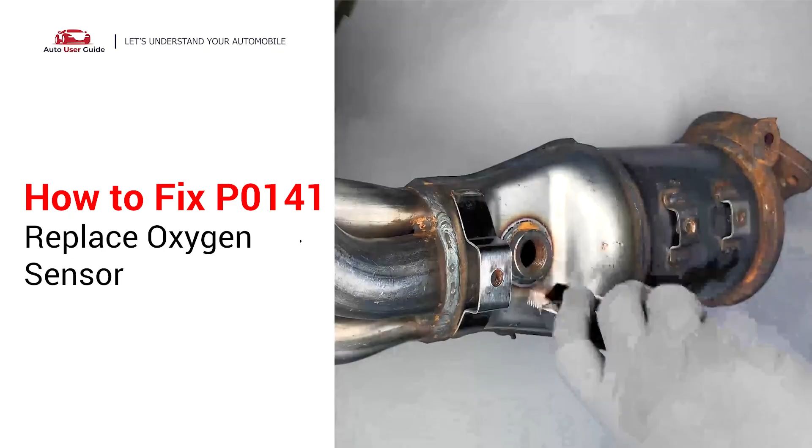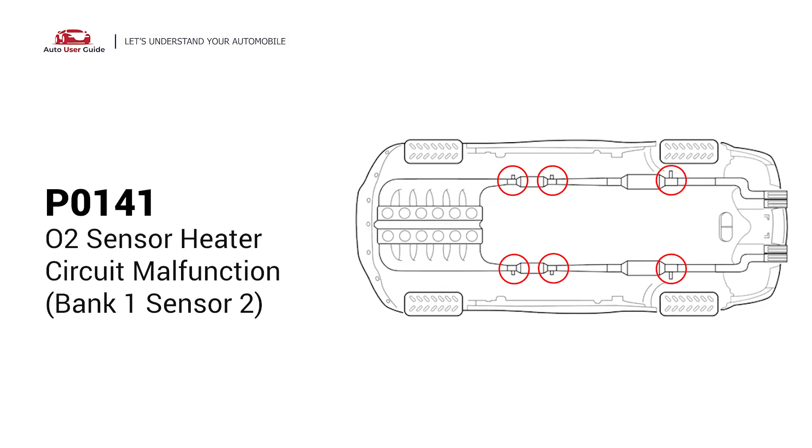By replacing the damaged oxygen sensor, you can easily fix the P0141 error code by yourself. This means that the O2 sensor circuit on bank 1, sensor 2, has no activity detected by the powertrain control module, PCM. Under this circumstance, short-distance driving is permitted, but your vehicle should be repaired as soon as possible.

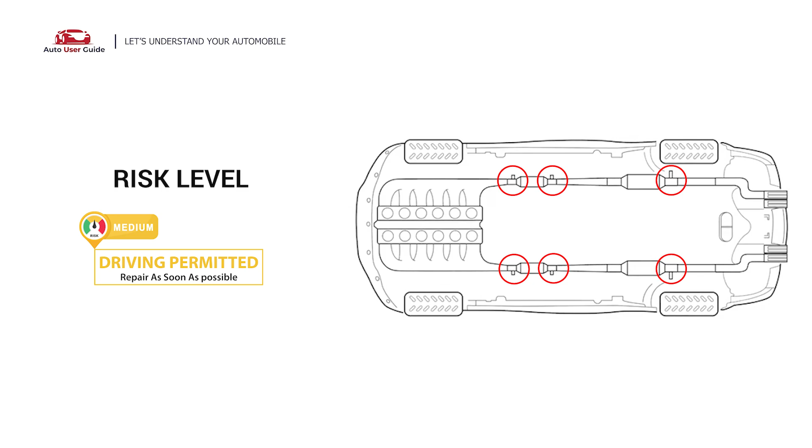Oxygen sensors, also known as O2 sensors, help determine whether the air-fuel ratio of combustion engines is rich or lean in real time.

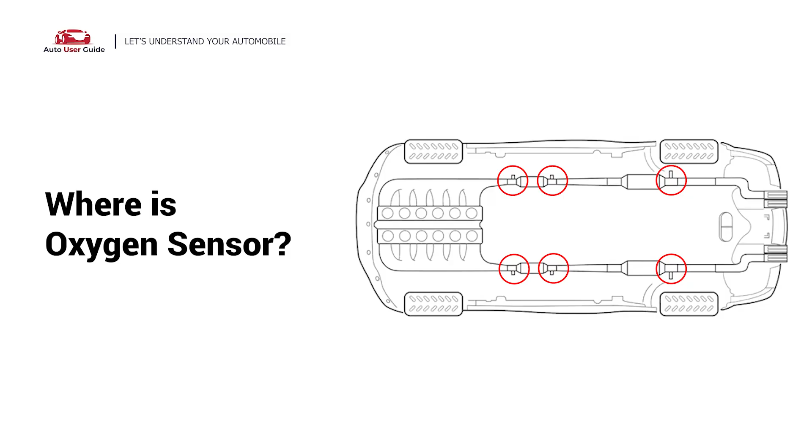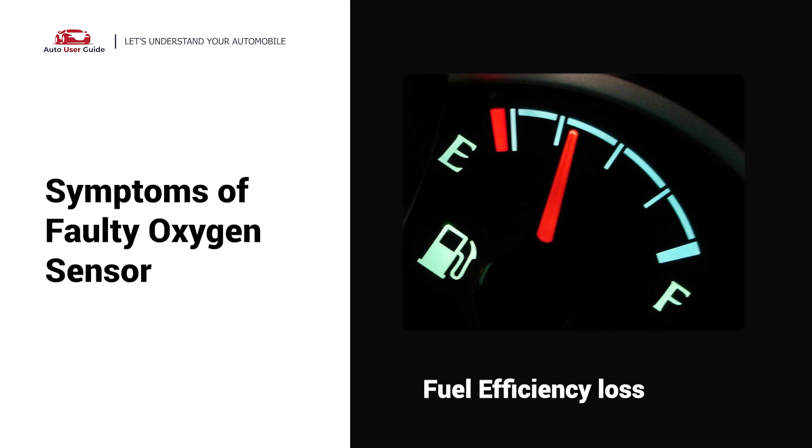Oxygen sensors are located before and after the catalytic converter, and here are the sensors' locations. A faulty oxygen sensor may cause black smoke to come out from the exhaust. You can notice fuel efficiency loss and a sulfur-like or rotten egg smell.

Here are two methods to fix the oxygen sensor. First, modify the oxygen sensor.

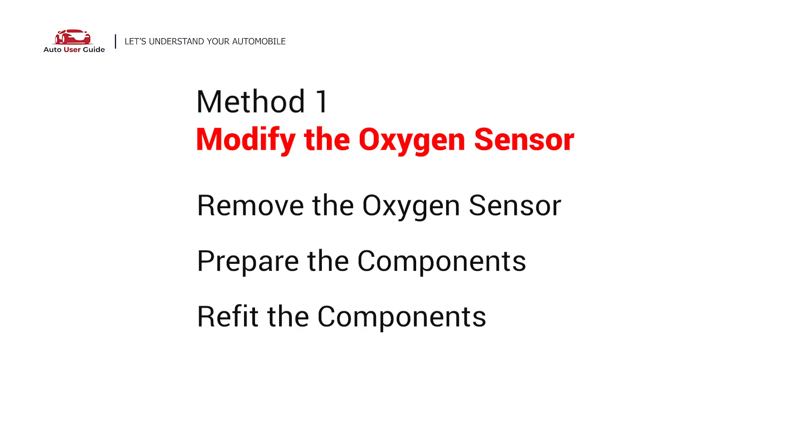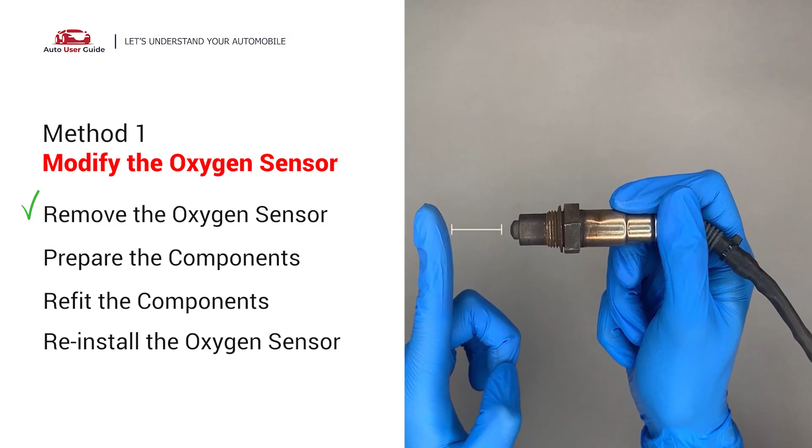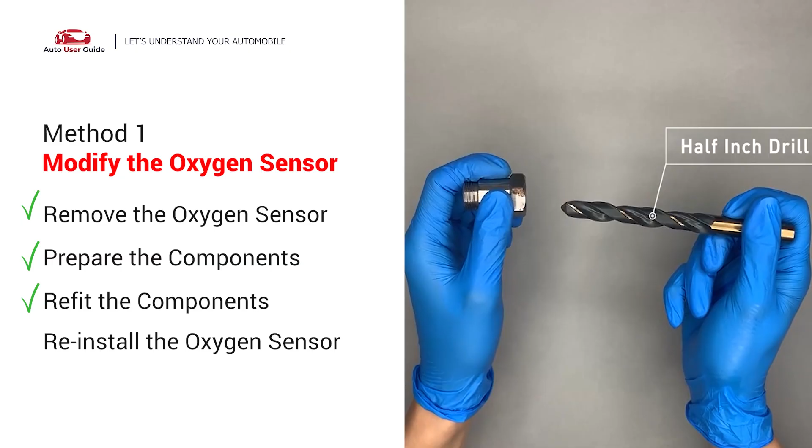You can remove the oxygen sensor from the converter by putting extra space between the sensor and the converter. Now, getting the spark plug non-fouler, there is now enough space to fit into the oxygen sensor, then use a half-inch drill to refit it. By doing this, put them together and put it back on the catalytic converter.

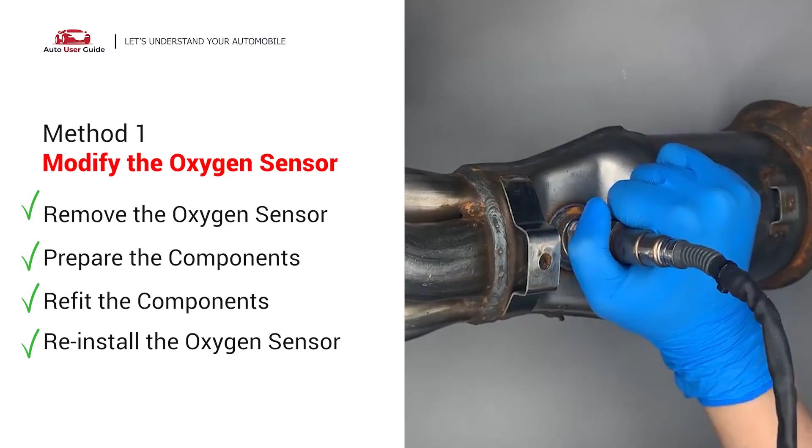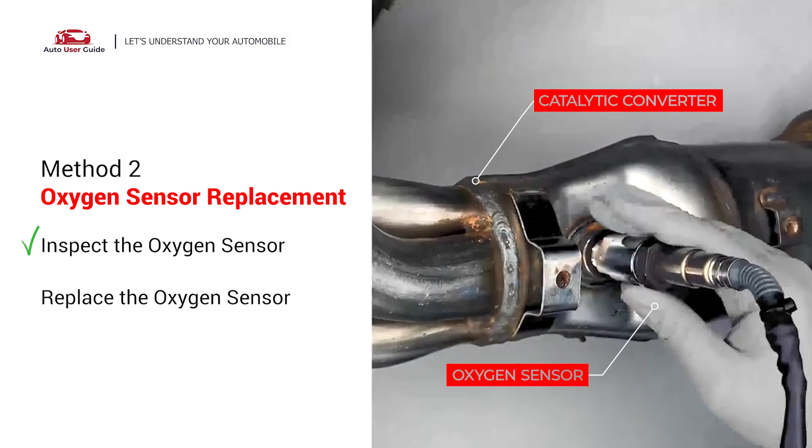Oxygen sensor replacement: carefully remove the oxygen sensor from the catalytic converter and visually check the oxygen sensor's electrical connections, wire harness, and metal tabs for any damage. If damage is found, replace the oxygen sensor.